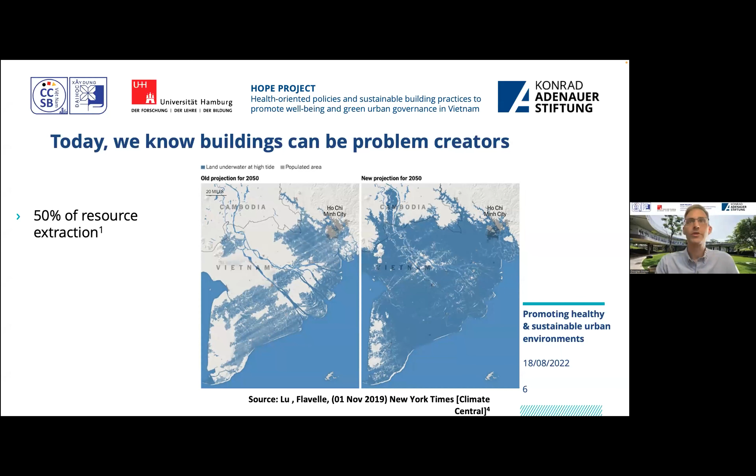What's happened, though, is that architecture has kind of become part of the problem, at least in terms of environmental issues. So we now know that a lot of resources are extracted for construction—that's about 50% of the world's resource extraction, and 37% of greenhouse gas emissions.

If we include the whole built environment, it's 50%. So the impact from buildings is significant, and this contributes to our footprint of consuming 1.7 planets worth of resources every year. We overshot our resources for this year on July 28th. So everything happening now is beyond what our planet can support.

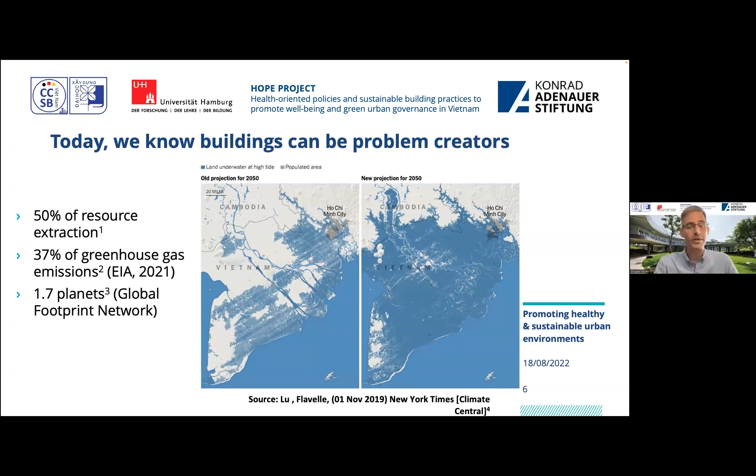This is an image, it's pretty drastic, but it's from Climate Central's recalculations of what's going to happen to the Mekong Delta by 2050 because of seawater rise. You can see what's happening even into Ho Chi Minh City. So this is all because of climate change and sea level rise, which is from CO2 emissions.

So what is sustainability? If architecture is going to start to engage with and be an actor in promoting sustainability, what does that mean? Ultimately, it means ecological balance. It means we have to figure out how to survive on this planet and provide for our needs, but also allow for all of the wonderful things that are alive on our planet to exist. So it's not just us.

And so then we start to think about the process of sustainable design. How do we do this? First, we have to know when to begin, and we need to begin as early as possible—basically during the conceptual or schematic design phase.

If you try to do green building later on, after the design is finished and the building has already started to be constructed, it's very difficult to apply green building techniques. You might be able to do some, but you won't get the same kind of impact or benefit as if it was done at the very beginning, and it's also going to cost you more money. So you really want to do this at the conceptual phase, to make sure it's a seamless process.

The team should get together, and that's not just the architects—it should be the architects, the engineers, the owner, and ideally the construction manager, so everybody's on the same page. Everybody has a different view of a project; they might see different issues that can come up, and they can also see different synergistic opportunities between the disciplines.

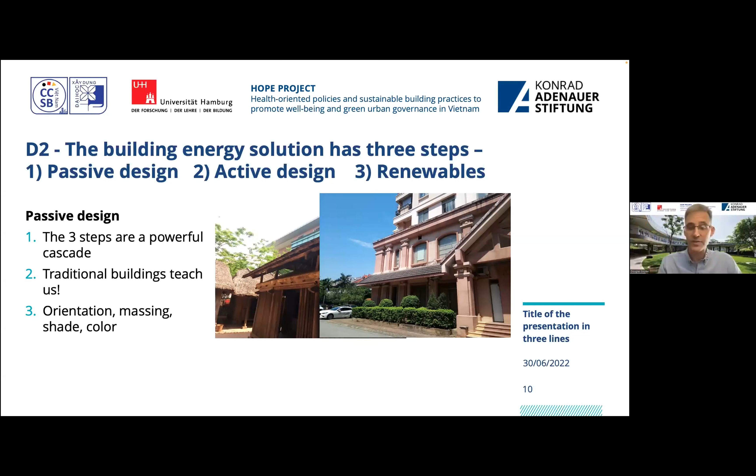It's also nice to open windows in the shoulder seasons, spring and fall, when it's not too hot or cold, and you can get some free cooling. In our tropical climate, it's really important to insulate roofs and look at your windows and how you're selecting those. I don't have time to go into detail, but it's different in temperate climates like Europe or the United States—here we really have to pay attention to the sun overhead.

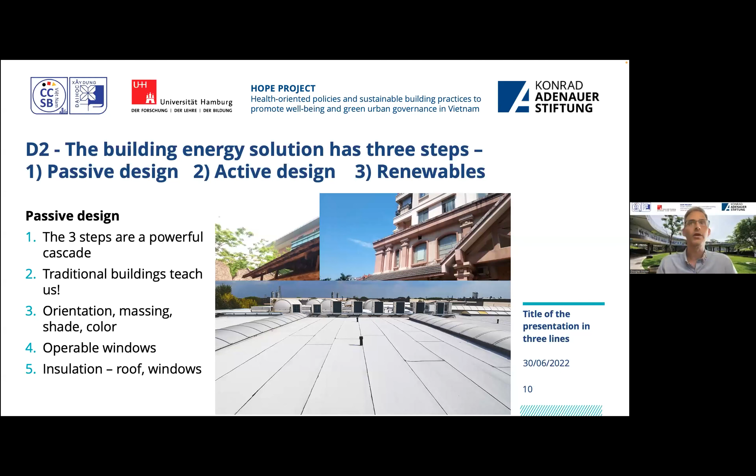The second step is our equipment. Air conditioning, obviously, where we are right now, is really important—it's the number one consumer of electricity for us. Also, we need to look at how we're lighting our buildings because that also consumes a lot. We can use the sun for daylighting to hopefully cut down on some of what we're using for electricity, combine that with LED lights. And then also ventilation.

Ventilation doesn't always happen, but if it does, we need to do it in a good way. This type of technology is very simple—it has a couple fans and a honeycomb core that does heat exchange. There's no pumps like an air conditioner, but this type of technology can be 80% efficient at cooling the temperature of the air brought in from outside, and about 50% efficient at reducing the humidity of that air. These are fantastic tools, they're called ERVs, and I always specify them in projects.

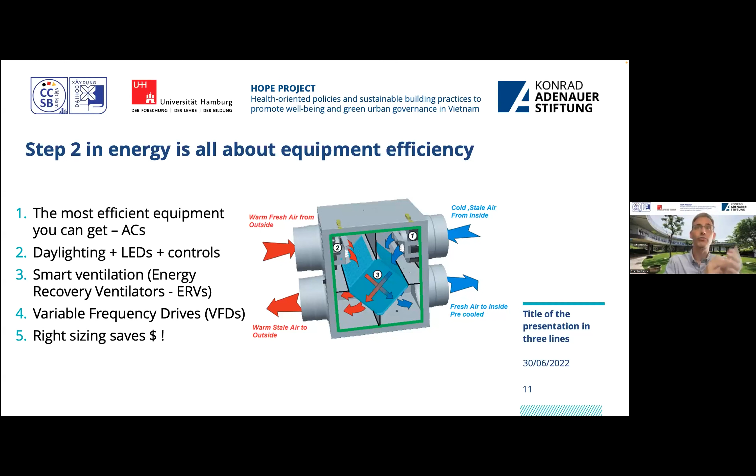Also for any pumps that might be in the building, VFDs—that's for the engineers in the crowd—and right sizing. If we do a good job with our passive design and a good job choosing the right equipment, we can lower the sizing of the equipment, especially cooling, that we need in our buildings. This is a huge money savings, and can offset what you might spend extra on windows or something like that. So if you can reduce the size of your equipment by 50%, fantastic.

The next dimension is water. I want everybody to think of water not just as water, but as energy, because that water has to be pumped to where we are, and it takes huge pumps and a lot of energy to do that. The way to be efficient with water is to choose the right basics—toilets, showers, faucets. That makes a huge difference.

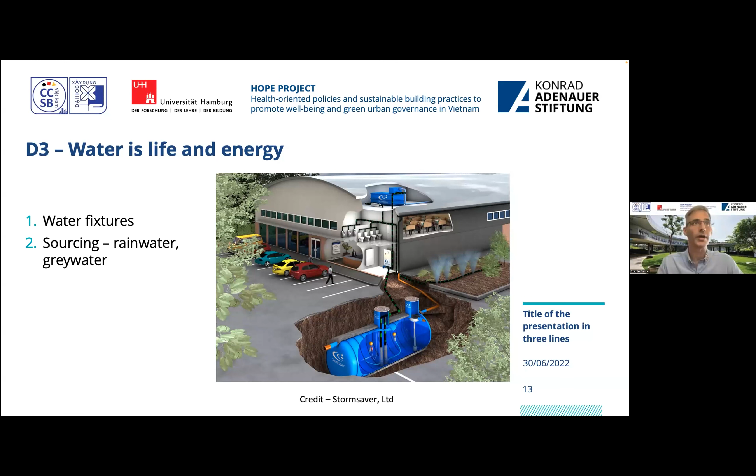Once you've done that, which doesn't cost any more, then you're looking at different ways and places to get your water. You could be getting it from rainwater on the roof, which this is a picture of, or gray water, using your soapy water for irrigation or maybe toilet flushing. This is also really good for emergencies in cities where utility water isn't supplied—if the water is contaminated, or there's a storm and power loss because of climate change, this kind of building can survive. It can still flush its toilets, people can still take showers. So this is also a resilience strategy.

The next category is materials. The biggest thing in materials in the last 5 to 10 years in sustainable design is to try and really have a life cycle understanding of materials—not just, is this coming from a bad source, or is this going to poison me in my building, but the entire picture, from extraction of the resource to manufacturing, what happens in the factory?

How is it used in the building? And then how is it disposed of at the end of life? And so now there's metrics and there's tools and software that can provide you some kind of an understanding of that. And that's called life cycle analysis.

So things are getting much more sophisticated with materials now. Construction waste is at the end of the life cycle. And we know that, for example, in the United States, projects that get LEED certified often can get 95% diversion from landfill. Basically 95% of their material waste is not going to a landfill from construction projects. And if it can happen there, honestly, it can happen anywhere. The construction industry is not necessarily the most advanced in the United States. We really just need to connect the dots between those materials and who needs them.

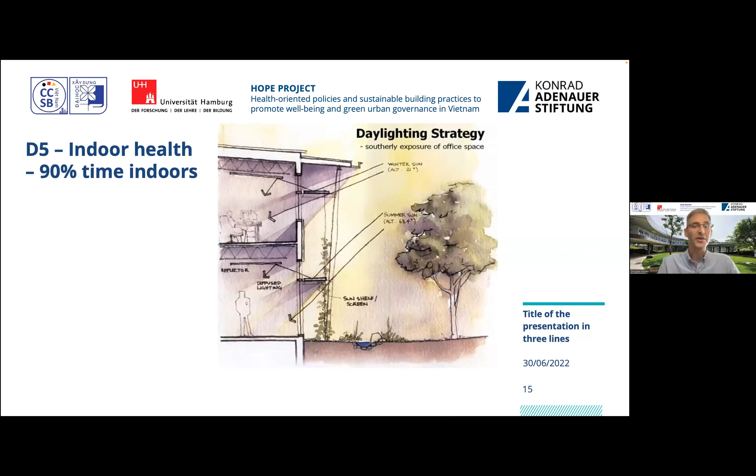So we do spend 90% of our time indoors, which means we have to take care of what's happening inside our buildings. Maybe walk outside sometimes. So one is that people don't realize that there's a lot of pollution inside a building as well as outside. People always think outside the building, air pollution might be bad, but depending on where you live and depending on the type of building, your pollution inside could be 5 times as bad as it is outside. So part of that is the materials that we put into a building. We don't want to put toxic materials in our buildings, because that builds up in dust and it builds up in the air as gases, and it's not good for babies when they're crawling on their hands and then putting their hands in their mouth, because children do that. So we have to be very careful about the types of materials that we're putting in our buildings.

One way to help reduce that exposure is fresh air. We need fresh air for lots of reasons. We need fresh air because we breathe CO2. And if you're in a very busy office, the CO2 will go up and you will get sleepy. That's not good for productivity. So if you're a building manager, an office manager, you don't want no ventilation in your busy office, because people will not be as productive. So we need fresh air for that. And we also need fresh air because of the potential air pollution that might be building up in the building. We do have to do it in a careful way, though. We have to use appropriate air filters, and that's a little bit technical, but it's possible and it's doable and it should be done.

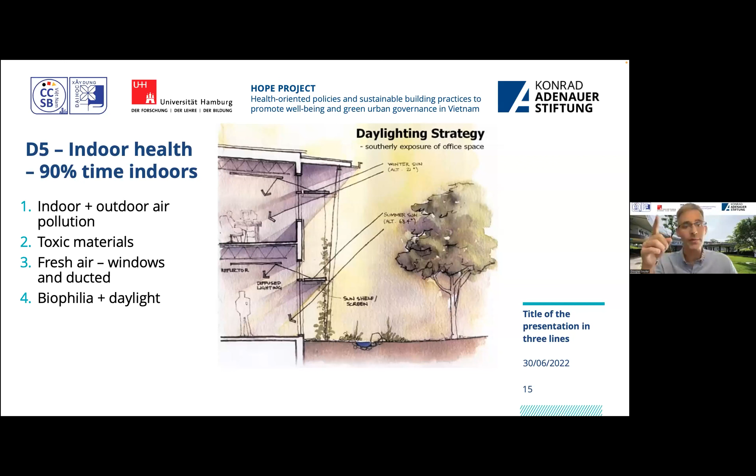The other is biophilia and daylight. So biophilia just means that human beings, we evolved with nature, and we need nature. We need to be connected to it. And when we are connected to nature, our stress hormones are reduced. So that's good for your health. The other is daylight. So daylight can also increase productivity. It gives a better rendering of color. So the colors of things that you see around you are much more vivid and more true when you have daylight. And it's just a better quality of light, and there's more of it, it's also free. So having connection to nature through biophilia and also good access to daylight, which is what this diagram is showing how you can achieve it to some degree, are really key for health.

Here's an example of a picture that I took of an office. One of the windows is tinted, the other window is not. So the only difference is some film that was put on the window on the left. And you can see how dark and gloomy it is on the window on the left and how more true to daylight it is on the right.

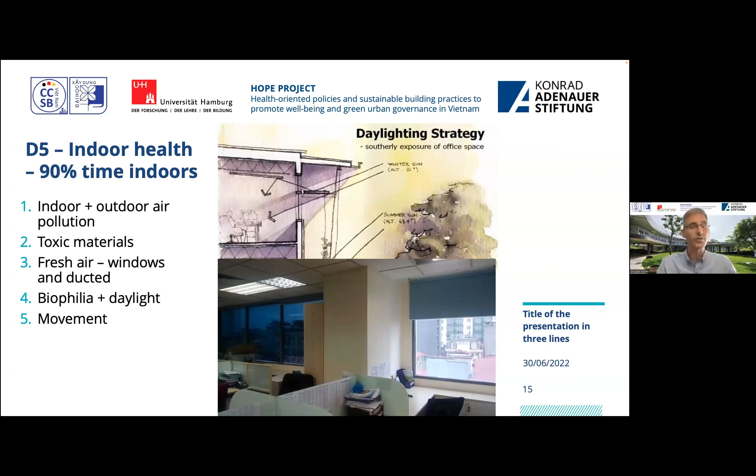And the other is exercise. We really need to be moving. There are ways to design buildings to invite and encourage people to use stairs, basically to make them bigger, wider, and easier to get to. We also want places where people can exercise in buildings if possible, and we want to put parking for bicycles in buildings so people can come to work by bike. There are a lot of ways we can encourage movement in the workplace and in buildings.

All of this adds up to performance, which is good for businesses, but also health benefits, which is good for everybody, including in the home. A lot of these features are also part of resilient design, but I don't have time today to go into that.

Okay, so this is kind of a wrap up. We have a lot of growth at this point. Green building has been around for about 20 years in a modern sense, and the World Green Building Council is overseeing a lot of that, with a lot of member organizations. There are 70 green building councils, including the Vietnam Green Building Council.

We also have a lot of energy simulation software for engineers and architects who might want to try it, and lots of protocols that give us a menu and guidance for getting certifications. The cost increase is really mild, at 1 to 3% - in Vietnam, VGBC did a study, it was around 1.4% on average. So we're not looking at a lot of money, and the payback is usually in 6 months to 2 years, maybe a bit longer for a super green building. Cost should not be something that intimidates any developer or architect.

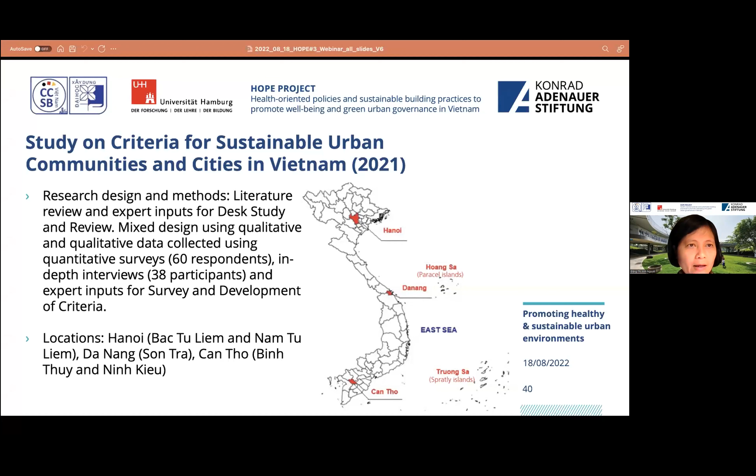About the result of our research, we built on the literature and came up with 5 criteria which we adapted from European frameworks and also the UN SDGs. This frame of evaluation allowed us to examine the sustainability of the built environment in Vietnam, focusing on 5 dimensions: space, governance, social dimension, economic dimension, and environmental dimension.

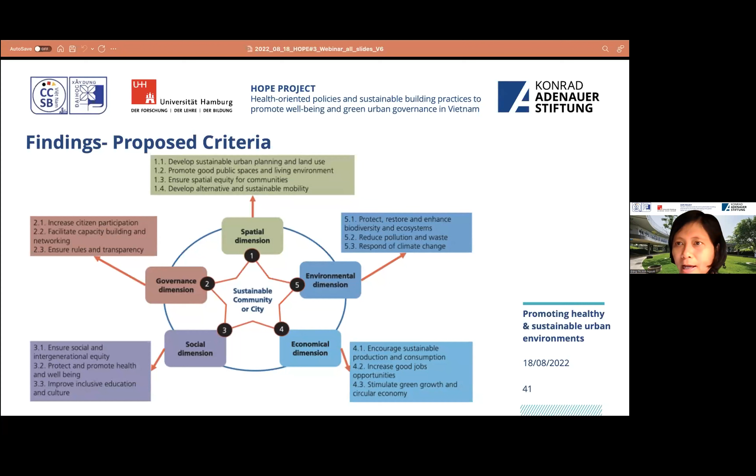In terms of space, we emphasize issues such as sustainable land use and urban planning, or good public spaces and environment. In terms of governance, we emphasize citizens' participation and transparency. In terms of social dimension, we emphasize issues such as social and intergenerational equity and inclusive education. In terms of economic dimension, we emphasize sustainable consumption and job opportunities. In terms of environment, we emphasize biodiversity and resilience against climate change.

After we have the criteria, we apply the new set of criteria to evaluate the sustainability of 3 locations. First, Hanoi. Hanoi is ranked as the least sustainable amongst the 3 cities we evaluate, compared to Da Nang and Cần Thơ. Da Nang is slightly better compared to Hanoi.

Da Nang scores almost 4 out of 5 on our scale. Cần Thơ performs quite similar to Da Nang. There are some slight differences in different criteria, but basically Cần Thơ is still better than Hanoi, still performs better than Hanoi. So this is the summary when we compare the 3 cities where we apply our set of criteria.

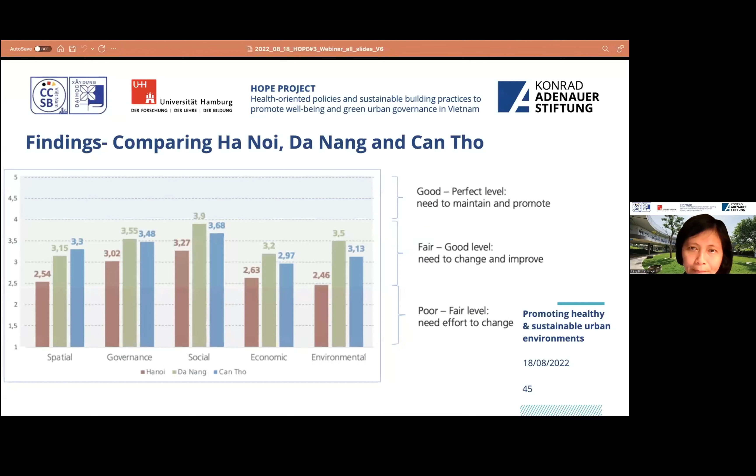In some categories, Da Nang outperforms Cần Thơ and Hanoi. When we conduct qualitative surveys in Da Nang, we also confirm the points from quantitative surveys. Cần Thơ also performed quite well. Hanoi, however, ranks the lowest out of the 3.

So in total, we have 16 criteria, and building on the scores from the 16 criteria, we compute a kind of cumulative score. Here we see that Hanoi ranked the lowest, while Cần Thơ and Da Nang perform better and are considered more sustainable by our criteria. Our study shows that within any city, there are obvious disparities, meaning that some disadvantaged and vulnerable groups will face more difficulties even in the city that performs quite well.

So again, we emphasize that some modifications should be made. For example, sometimes we believe that the scores of a city depend a lot on subjective perception. In one city, people may have a higher expectation, and so they rank the city quite low, while in some city, although the city performed quite well on our score, it's very much because the people in those cities do not have too high expectations, so they easily accept the condition of their living.

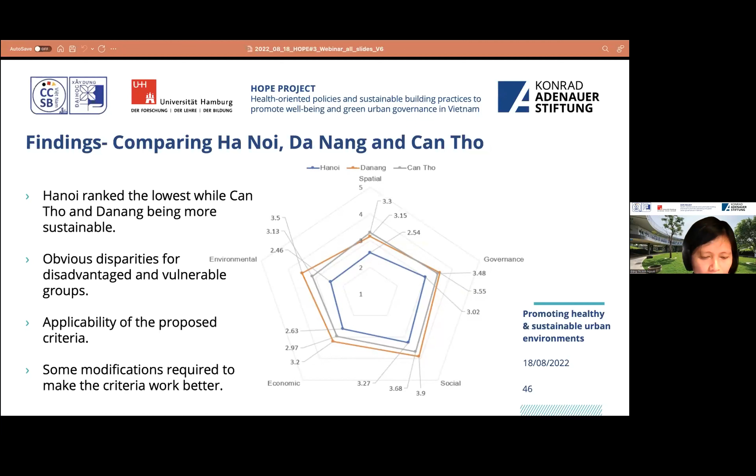For that reason, even though from our perspective we believe that their conditions should still be improved, many local respondents are satisfied with the environment. So again, we think we need some modification to our model in order to reduce the subjective aspect of responses. And another thing is that we also need to include more issues as criteria. For example, issues such as levels of corruption and gender equality have not been mainstreamed in this model.

So I have talked about the criteria, but now I want to talk about some specific issues, which is health, and which is the main focus of this project. There have been several approaches to deal with health issues in urban contexts. The first is the medical model, which emphasizes physical health. The second is the social model, which focuses on social life and social cohesion. There are also models using the psychological approach. And there's another model which uses the eco approach, emphasizing in particular the impact of changes in the ecosystem on the health of urban citizens.

According to WHO, we need to pay attention to all factors that may affect the health of urban residents, for example, age, sex, housing, services, unemployment, work environment, education, food supply, and culture. So basically, in order to evaluate whether urban communities are sustainable, we believe we must include a wide variety of factors, not just physical health and so forth, but also other issues such as social and cultural.

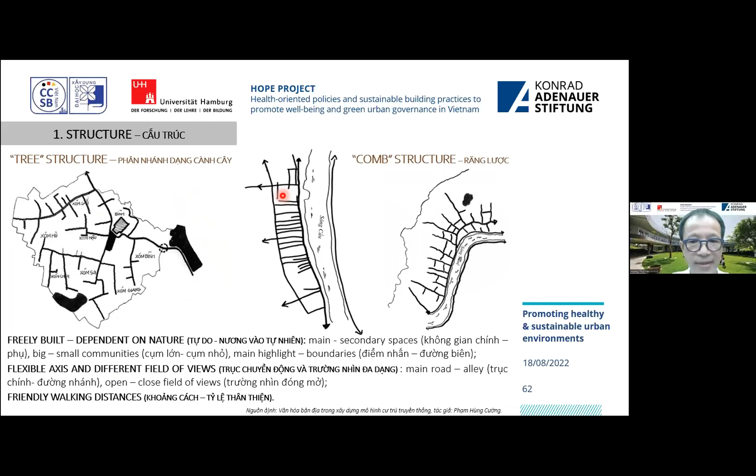The first is the emphasis on humans' health, and the second is the utilization of cultural traditions in modern architecture. We want to develop projects that allow Vietnamese cities to have its trademark DNA, which means that we utilize the traditional values in architecture in our modern day buildings. So for example, if you look at Vietnamese villages, and the Vietnamese villages are normally designed using some kind of very distinctive structure.

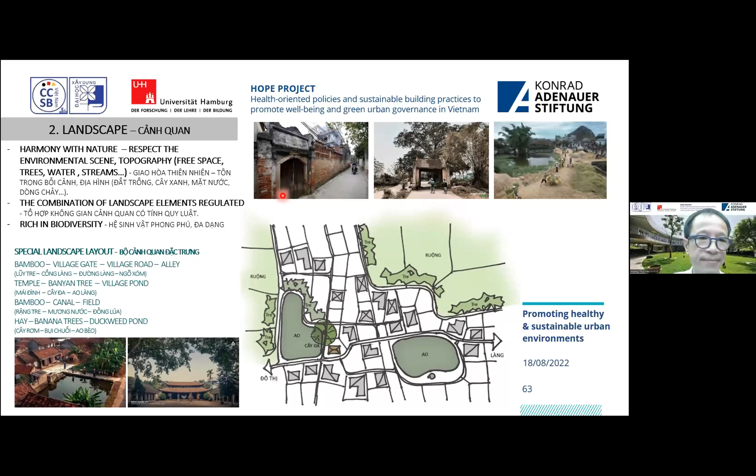With a very typical landscape. In a village, you will see a village gate. We see very small alleys, and there's also bamboo fences. So basically in our villages, there is no hard fencing that separate the village from the outside, but very natural fencing marked by bamboo fences.

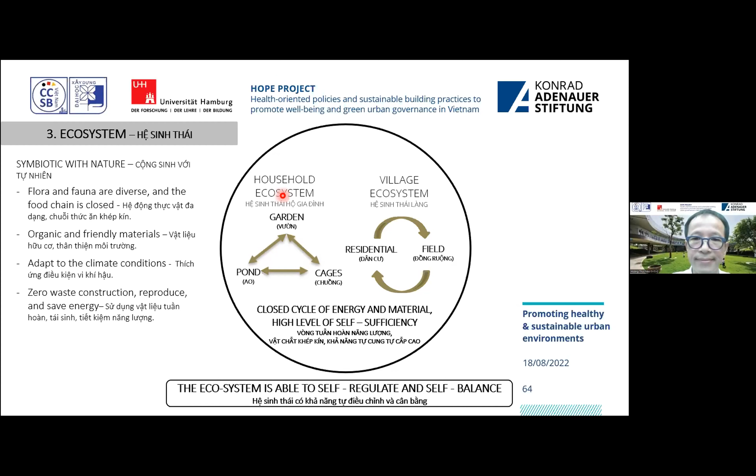And another thing is that the traditional Vietnamese villages are also a fully circular ecosystem, which is very symbiotic with nature. This is very typical of traditional housing in Vietnam in the past, which is the VAC garden, ponds, and pigsty. So before they build a house, they will dig a pond. The soil will be used to build a house and also the cage. And then the ponds, so the excrement from humans' life will be used as food for the fish as well.

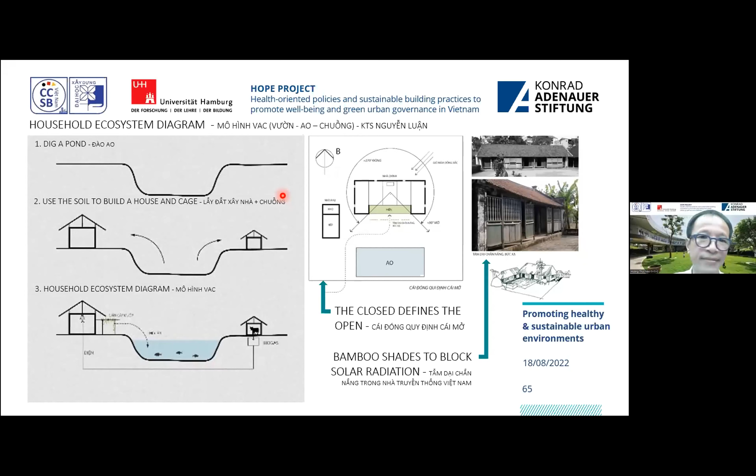And furthermore, in Vietnamese villages, the houses, the directions of the house will follow very much the natural conditions in order to maximize sunlight as well as to minimize exposure.

And another thing about the villages is that the design of the village would facilitate social relationship and cohesions, because we understand that proper sustainable living means not only physical buildings, but also the social relationships and the sense of belonging and community that can be created by specific design and architecture.

So within a village, as you can imagine, the way the village is structured facilitates social cohesion. So we want to build on those ideas. We want to utilize the village style architectural values in our modern architectural village projects. So I will use three examples: the jackfruit village in Hanoi, the vertical village also in Hanoi, and another one, the workers village.

Now, the jackfruit village, we want to utilize a traditional architectural style which emphasize the self-sustaining and circular economy. So all the buildings, we try to maximize the natural shade. So the roof is designed similar to the canopy.

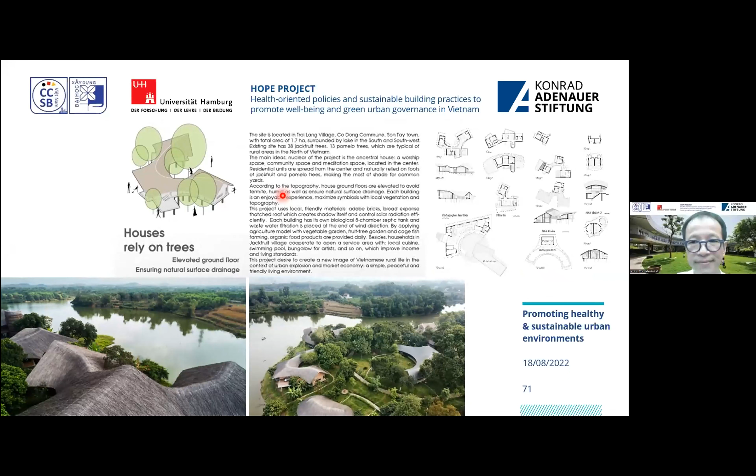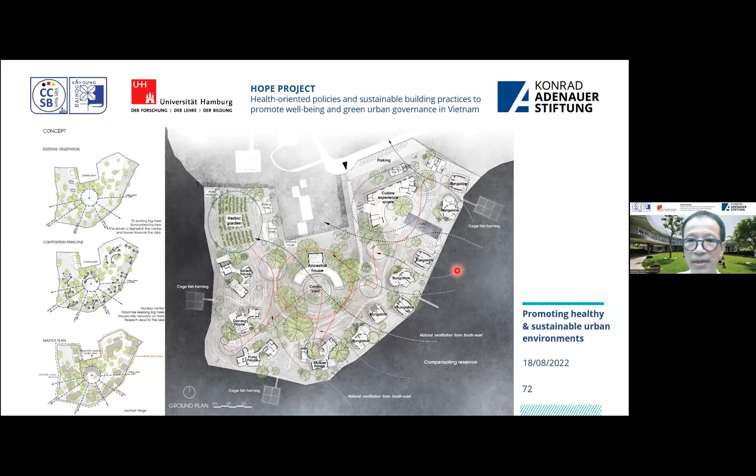So the houses rely on trees. And the layouts of houses are very diverse. So we do not use a consistent design. So the houses, the designs of the houses are different in order to utilize the topography. So at the high grounds at the center, there is the ancestral house, and the ancestral house is surrounded by bungalows in the surrounding.

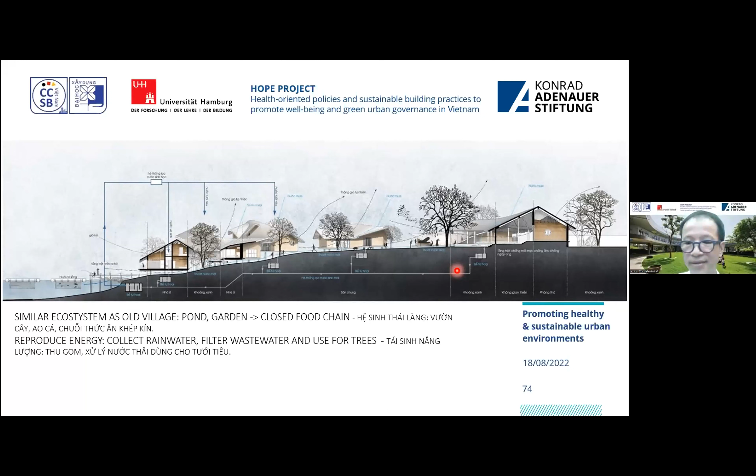And when we build this village, we retain the original terrain. So for example, the water surface, and we build the houses in ways that facilitates both airflows as well as drainage. And the village is designed in ways that allows not only drainage, but also water collection. So we allow rainwater to be collected into the ponds, and the ponds is used for rearing fish.

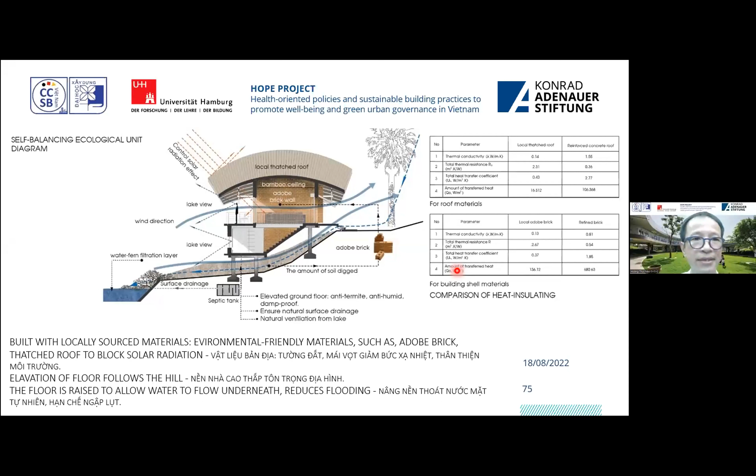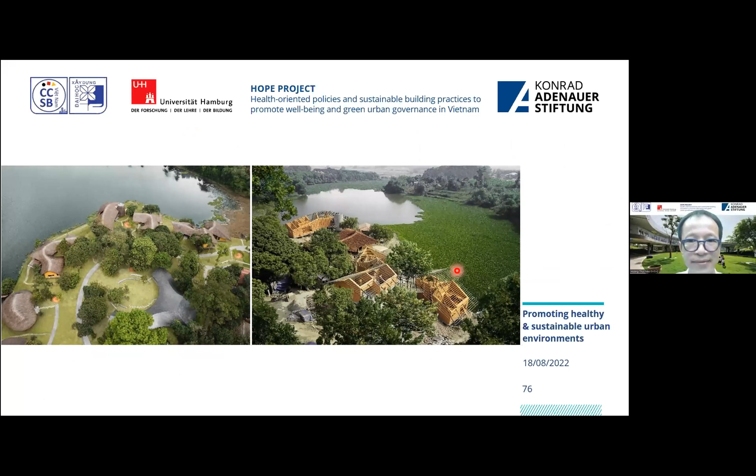And this is the typical designs of a building. We use the local thatch roof, which is environmentally friendly, and we use adobe brick for the walls. And as you can see, all the houses are almost mixed with the tree. The houses are blended with the trees. And so we utilize the idea of the villages in the past where houses are built in ways that really mix with nature.

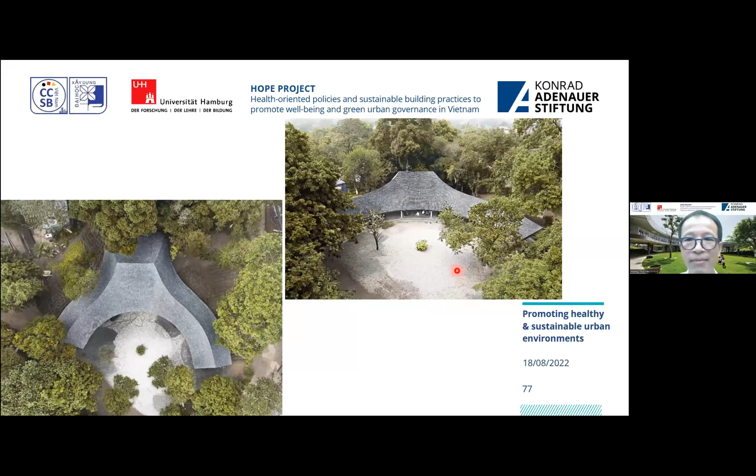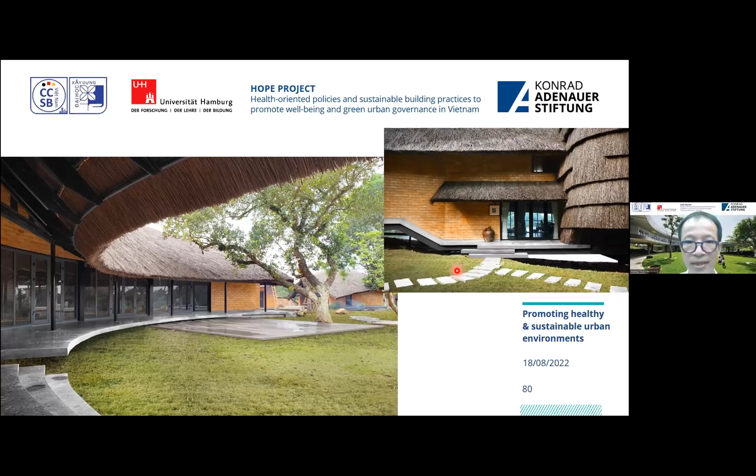So basically, the idea of the jackfruit village is that we've tried to recreate a village. We want to emphasize the harmony between buildings and nature, as you can see.

Another example is what we call the vertical village at the center of Hanoi. In Hanoi nowadays, we see lots of skyscrapers and apartment blocks, like in other places such as Singapore. But we want to recreate the idea of hanging gardens. We don't want to build buildings that are too high, of a decent height, no more than 20 floors.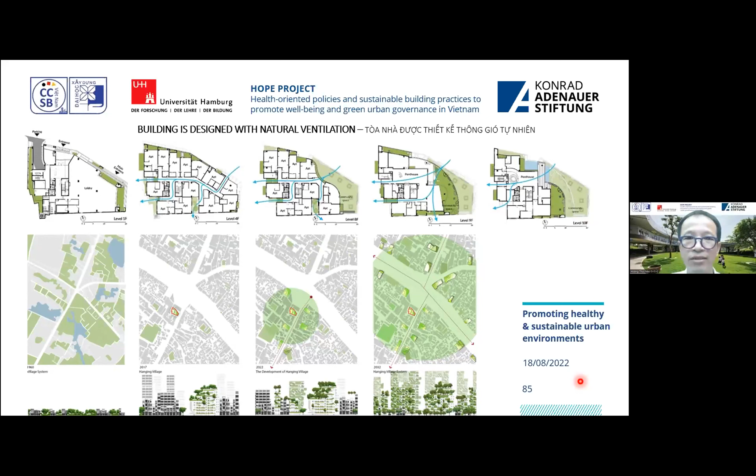In the future, we want to create more buildings of this kind, which we call the green oasis. They will create green dots in areas that are defined by concrete.

So this is the vertical design of the building. Each floor will have a different style of shading and different green areas, so people who want to enjoy more green space may have that option.

This building is located at one of the most focal traffic junctions in Hanoi, and the design allows residents to enjoy a better living standard.

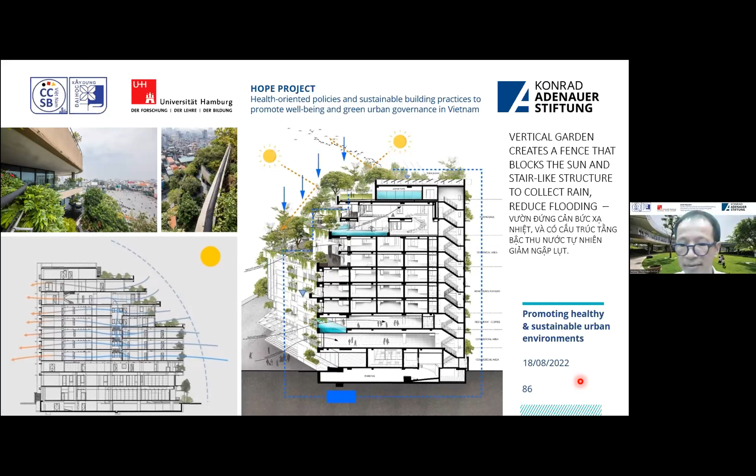You can see that we even try to incorporate big trees into this building. This is a very bustling traffic junction, and we have a green spot right there. I believe people living in this building will enjoy a better living standard.

As you can see, this building utilizes not just straight lines but lots of curves, and the buildings are designed not in a consistent way, but in different styles. It's really friendly.

The curves and the shades - we always try to create large shades for every apartment, because Vietnam is a tropical country and the shades are crucial. The shades allow natural cooling.

So the idea of the vertical village is that we adopt the village structure but make it vertical, creating a self-sustaining ecosystem that utilizes open spaces and green spaces. In the future, we want to incorporate more natural features, for example, even ponds on high ground.

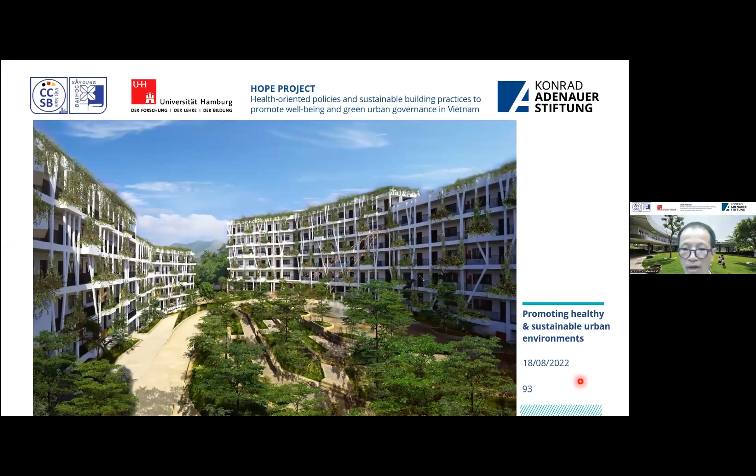This is the residential area for workers working for local chemical plants. The workers come from different regions, so we aim to create a village for them all. This is the master plan of the project.

We want to design not just a place for the workers to live and sleep, but to maximize the sense of community. For example, our buildings are designed in ways that a resident sitting in one room can see people on the other side.

For that reason, we design the alleys and balconies in ways that are friendly and safe. Children can run and play on the corridor, and the corridor facilitates different views - people sitting or standing there may see people on other buildings and can look down on the common yards below.

As you can see, we try to maximize the shade using the many trees that we plant. The idea behind this is that we want to create a community, not just a residential quarter.

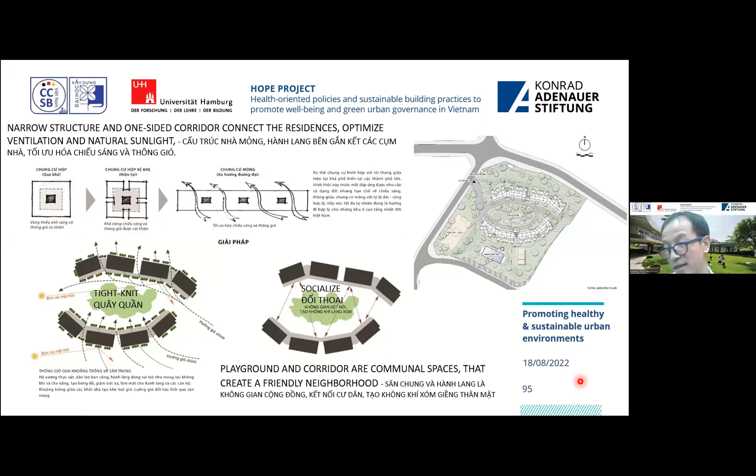We want to allow the workers a sense of peace, which will help with their mental and physical health. Workers come from different places and may feel homesick, missing their homes. But if we can recreate a sense of community right here, it will help with their mental health.

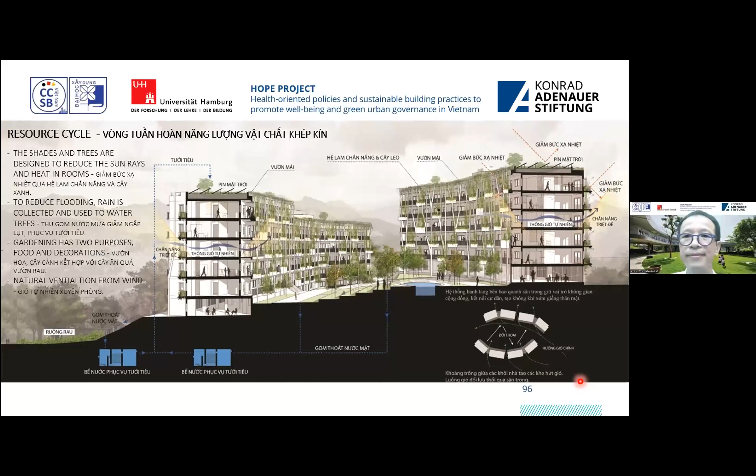This building also utilizes a recycling model - we have an irrigation system on the top and we use solar panels. So this is the concept design.

At the moment, as you know, the Vietnamese government is encouraging the building of workers' apartment blocks in ways that are green and friendly. This is a project that has received acclaim by the Ministry of Construction and Vietnam Confederation of Labor.

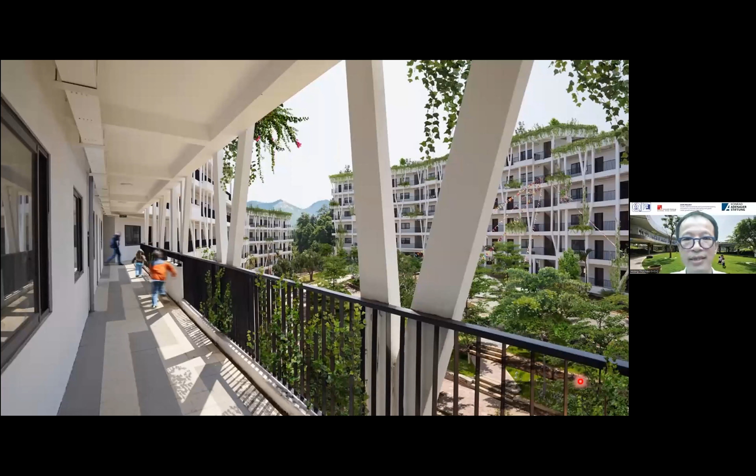As you can see, this is the corridor. The corridor facilitates a friendly space for people and children. So the idea of the workers' village, we design the buildings to maximize social cohesion. For example, workers, just like villagers, they stand on one building, but then they can call out to their fellow workers on the other side, which is very similar to the village where houses are tightly knit together.

So using the three examples and the experiences that we learn after 20 years, we believe that in order to have a decent, sustainable project, it is normally quite difficult. For example, we need to persuade the owner of the buildings. However, during situations such as COVID-19, the projects of the kind that I've just shown you show stronger resilience.

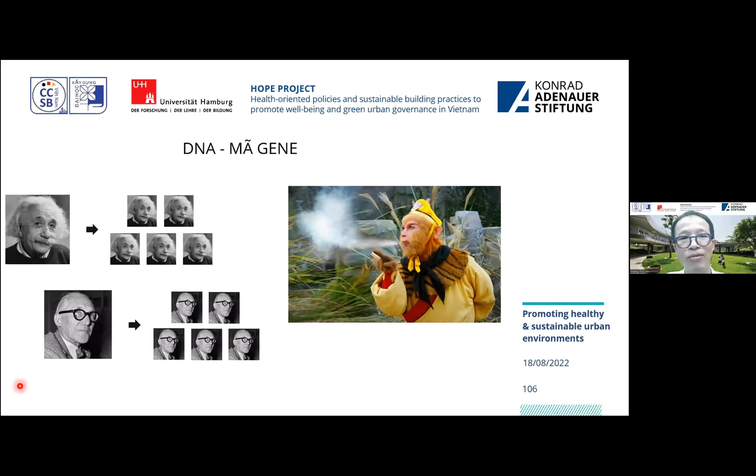So this is an example that I want to use to talk about DNA and cloning. So basically what we want to do is to have a diverse model that utilizes local conditions. Einstein or Le Corbusier are great, but we should not try to clone them everywhere.

So this picture demonstrates the problem with cloning. We try to impose a simple model everywhere in the world. Why? In fact, we should try to utilize local conditions and cultural traditions, in order to both preserve cultural diversity but also to utilize cultural knowledge in modern day architecture. And in that course, architects should take the lead. The architect will be the doctor that provides the solution for our architectural problems.

My thanks to Dr. Hao for sharing with us a series of examples about how to utilize traditional architectural styles of Vietnam into modern day buildings, and he also emphasized the importance of developing a social consciousness about sustainable buildings.

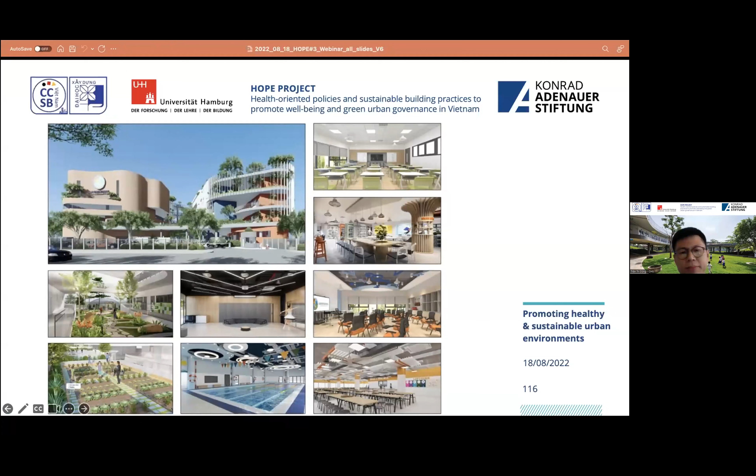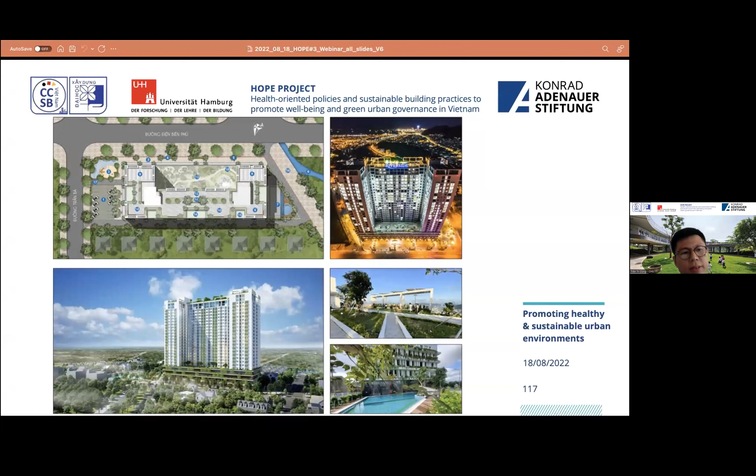In addition, we also utilize a passive architecture. For example, we create lines and holes that maximize sunlight and natural air ventilation. We also maximize the use of adobe bricks that can reduce carbon emission.

And in the outer facades, we compute specific ratios of glass to walls and the ratio of window to walls according to green standards.

And we also use paints that have low VOC. And we often use white and bright colors to reduce heat absorption.

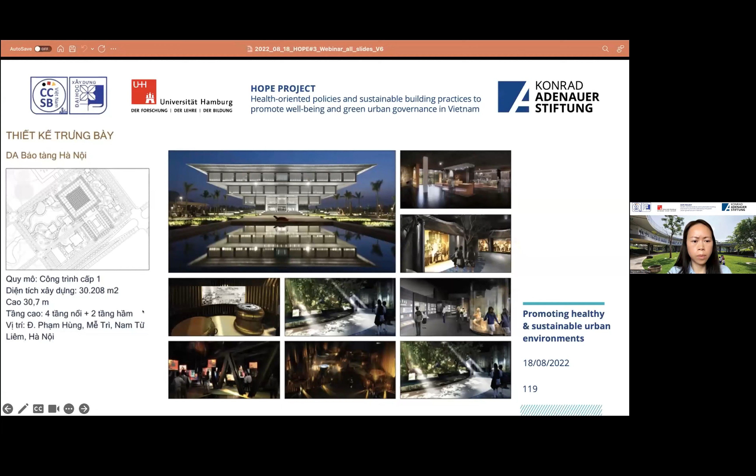When we use glass, we always use low-E glass for buildings that have facades facing the west, which is often exposed to sunlight.

As I mentioned, when we talk about health, it's also a matter of mental health. Mental health relies a lot on the availability of amenities available to residents. So for each project, we have basic amenities and advanced amenities.

For example, there are meditation or Zen quarters, libraries. We're also considering a model in which we have a traditional medical house or traditional clinic, which provides residents with traditional medicines.

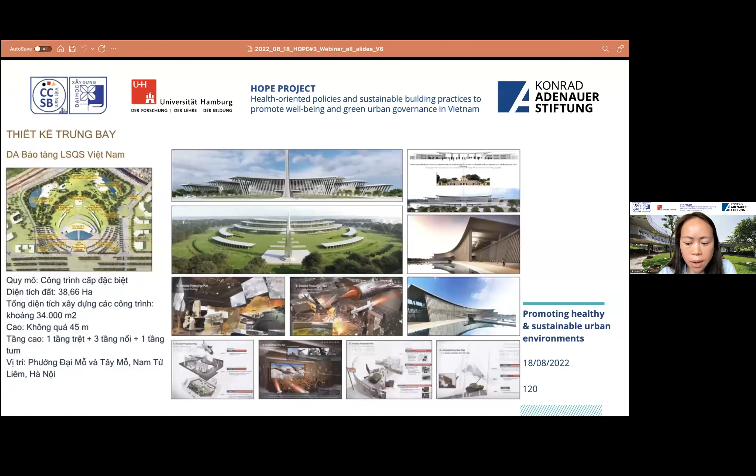He highlights the role of owners and investors who are really willing and determined to invest in green buildings that provide customers with housing products ensuring both their physical health and mental well-being. I'm impressed when you say that in some of your projects you already incorporated plants that can recycle household food waste into manure or fertilizers.

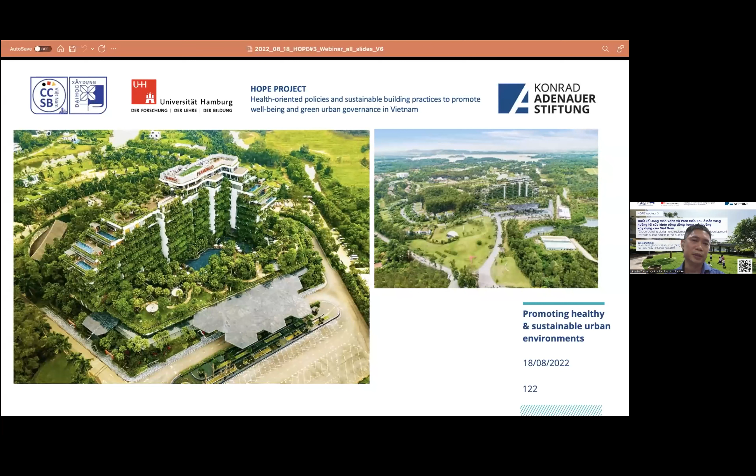As you can see in the presentation by Mr. Hao, clone buildings not only generate huge heat island effects, but are also very emotionless. So why can't we change that situation? Why can't we design buildings that allow us more emotions, allow us to be closer to nature?

So this building was built in 2015, a 12-story building. For this building, you can see that we try to incorporate a large space of greens and balconies.

Each balcony will serve to create a shade. It functions like a veranda, which will cool the air before the air enters the home.

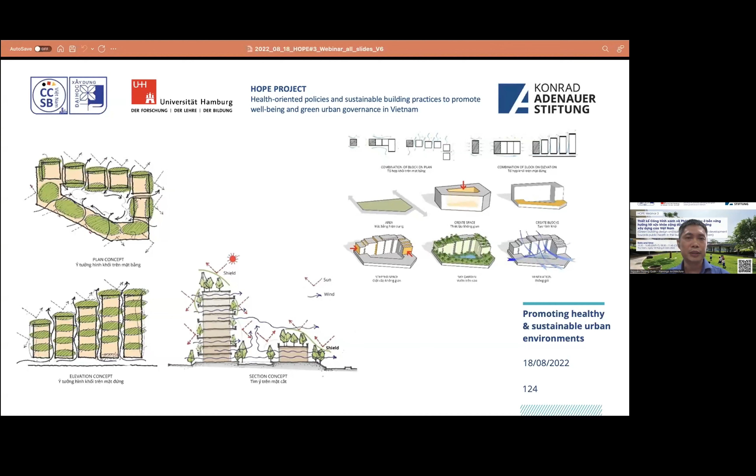When we build this building, which we call the forest in the sky, we want to utilize that idea. So the buildings will be covered with balconies, and the facade faces the south, which minimizes sun exposure, and the balconies help cool the entire building down, allowing the air to cool before it enters the inner space.

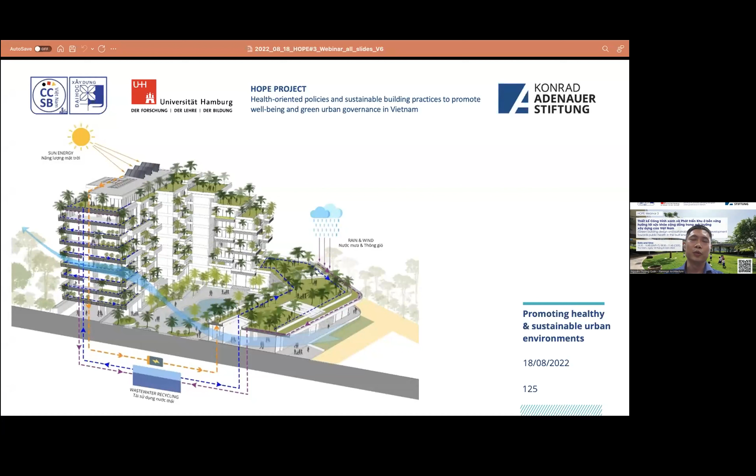It also means that air ventilation will be maximized, and it reduces the impression of concrete buildings. It allows residents to feel that they are living in nature. So anyone sitting on the balconies, looking far away and looking down, will feel as if they are living not on the 10th story, but actually on the ground.

So in the building, we also try to save energy. For example, the balconies and the rear lobbies total 5,000 square meters. If you had to air condition the entire space, it would be very costly, and if you multiply that by every year, it would be a substantial cost.

But when we design this building using natural air ventilation, it will be both economical and good for people's health. We also try to make sure that natural air ventilation won't have any negative effects.

For example, we designed a system that allows us to close and open airflow gates flexibly, so they can be adjusted, opened and shut. When the air is fresh, we let the air in. During winter, when it's cold, we shut the airflow gates to prevent a cold spell from entering the building.

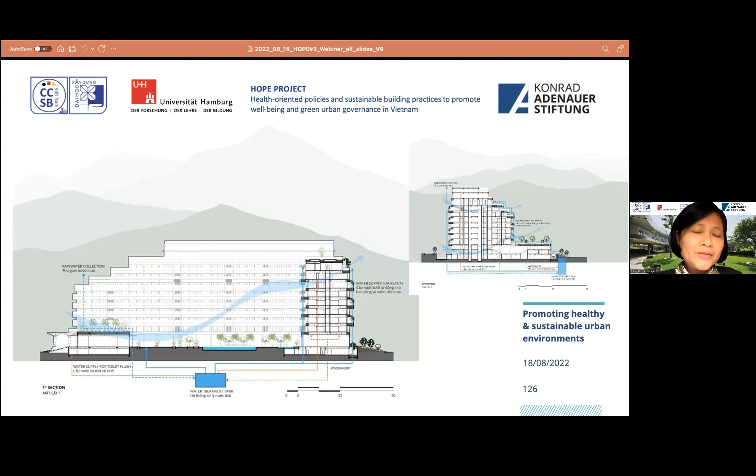But I want to add that we need more to ensure a sense of community. I understand that as architects working in an urban context, I assume you are often asked to pay attention to customers who are able to pay. However, at the same time, our research wants to emphasize the aspect of equality. So the sense we're trying to promote is that we want to create spaces that ensure a sense of community and equality for everyone. I'm currently living in New Zealand, and a friend of mine told me they used to

have a villa, a very big villa. The villa was protected by security guards with guns. They said that the building where they live is surrounded by barbed wire. And they said that people in the surrounding neighborhood are much poorer, so they're afraid that the villa may be the target of robbery.

So again, sorry, I should have mentioned that my friends are living in Malaysia. Later on, because they feel they don't want such a life anymore, they moved to New Zealand instead. So back to the example of my friends, when they were living in Malaysia, the problem is that they had a building that suits their own needs. But the problem is that the surrounding social environment did not support, did not give them a sense of peace,